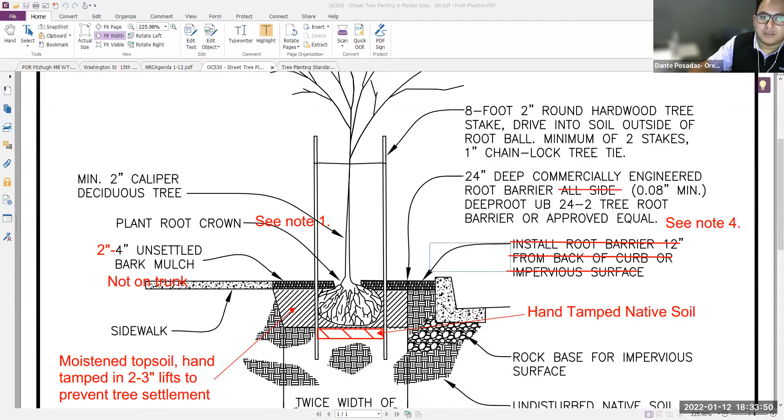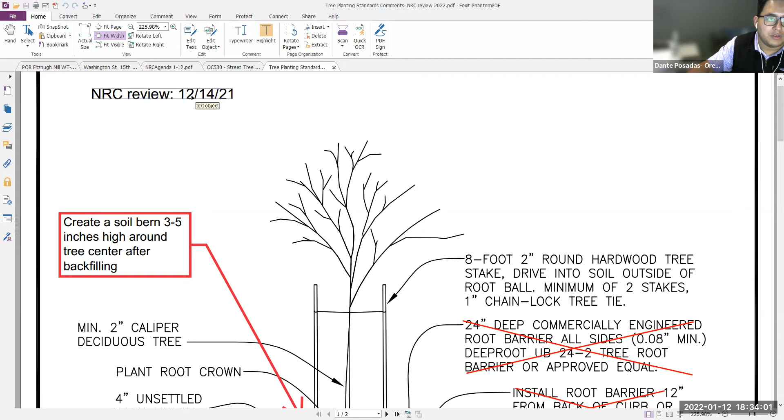Okay, so these are the comments we got from you guys in an email on December 14th. I don't know exactly when the review happened at the NRC meeting, but I got an email forwarded with these comments. You guys would like to see the 24-inch root barrier on all sides removed, and you wanted to see a root barrier flush with the sidewalk at 18 inches, minimum 10-foot length centered on the tree trunk. So I think that's what you guys are showing here.

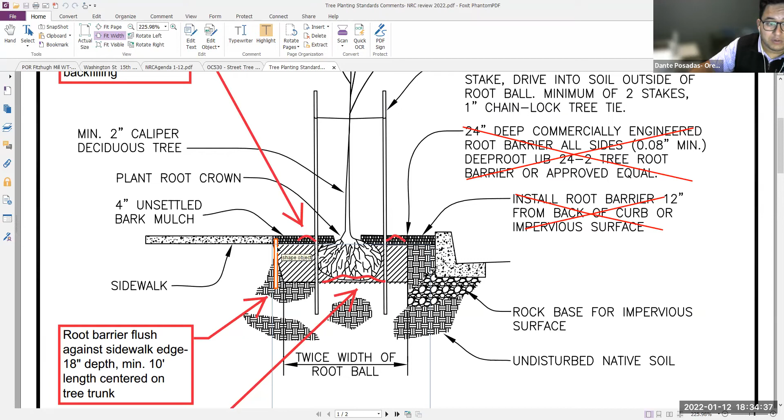You would like an 18-inch that spans 10 feet, which would be more or less 2 sidewalk panels. Here you also wanted to create a soil berm that was 3 to 5 inches higher than the top of the root ball or the tree center at the backfill.

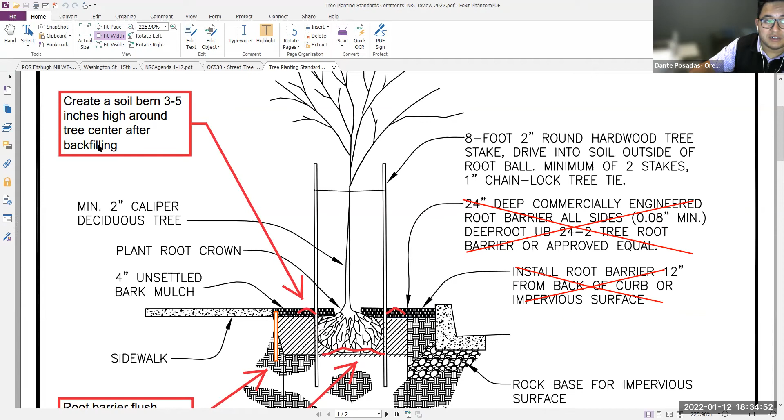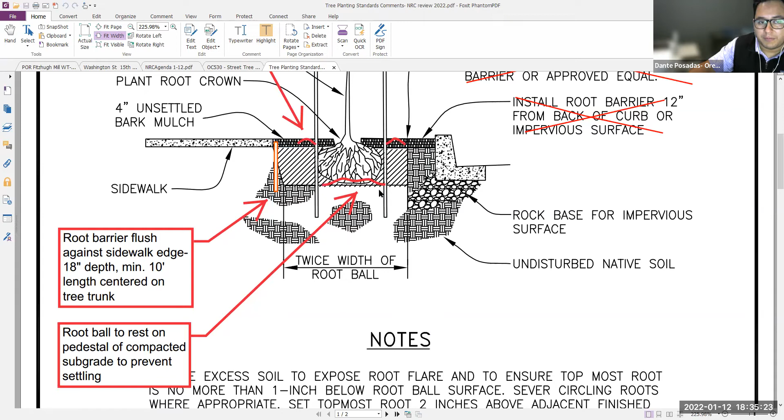And then this placement of the root barrier from the back of the curb or impervious surface, you guys cut that out at 12 inches. And then there was a note here that says the root ball should rest on a pedestal of compacted subgrade to prevent settling. So that's just ensuring that the root ball gets planted on some type of compacted subgrade so that it's not going to settle and cause any issues.

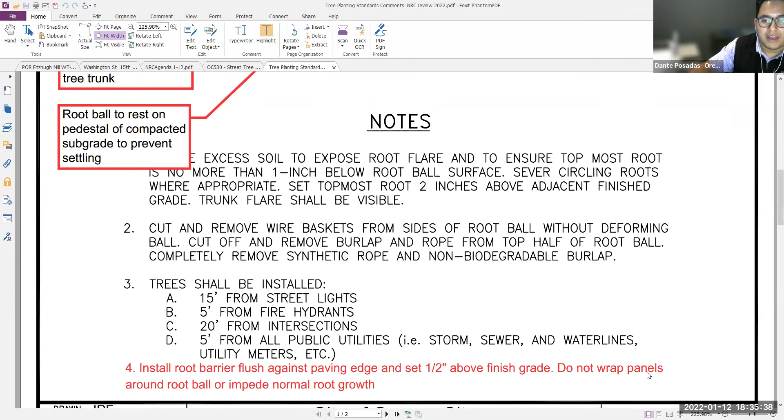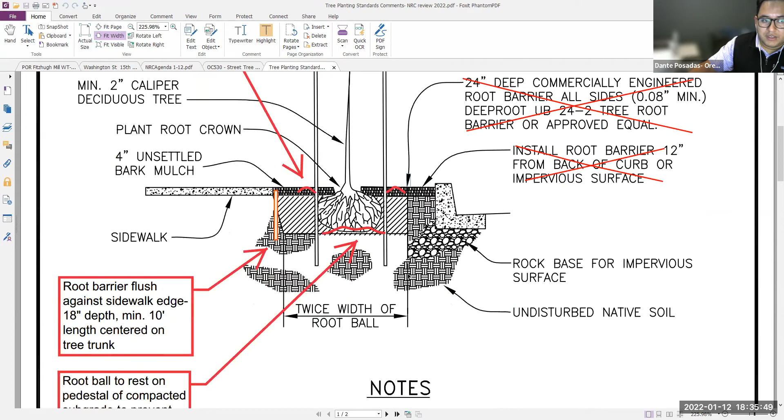And then install root barrier flush against paving edge, set 0.5 inches above finished grade. Do not wrap panels around root ball or impede normal root growth. So these are all the questions and notes that you guys had for us.

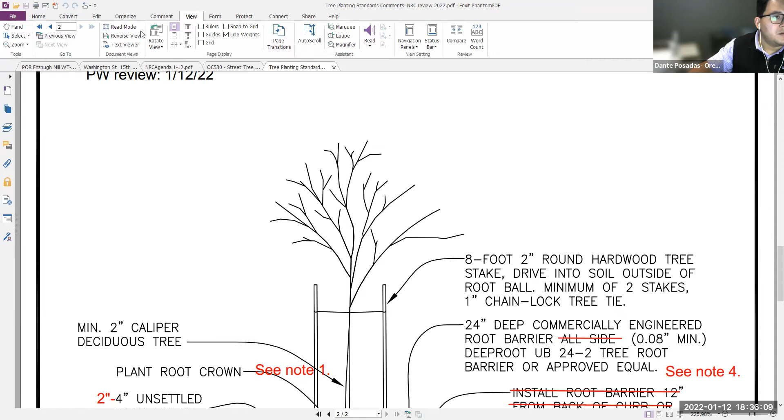We had an internal meeting with our street department and our development department, and we did a review of the standards. I'm sorry, let me make this smaller. Okay, so we did our own internal review. This is just dated for today, but we had one about a week ago.

We are still looking for the 24-inch commercially engineered root barrier. We will not—this is kind of trying to incorporate your notes with what we've seen in the field in construction and some of the issues that we feel we need to protect against.

So we want a 24-inch root barrier for protection, because generally our street sections are 18 inches in depth, and we want to make sure that we're protecting the compacted dirt, the curb, and the asphalt well. So that's why we are doing a 24-inch root barrier there.

The other reason why we have it at 12 inches from the back of curb is because generally when we're building roads, the compacted subgrade extends about a foot behind that curb, so that the curb has structural stability on the backside and won't settle or anything like that. So that's why we're going 12 inches off of the back of curb, and that's why we would like the 24 inches.

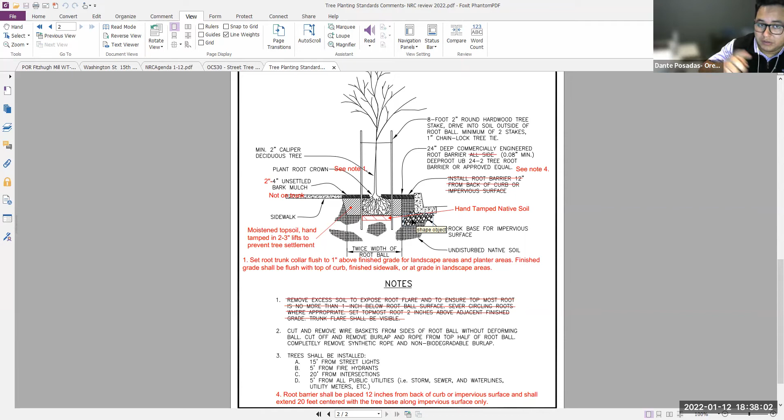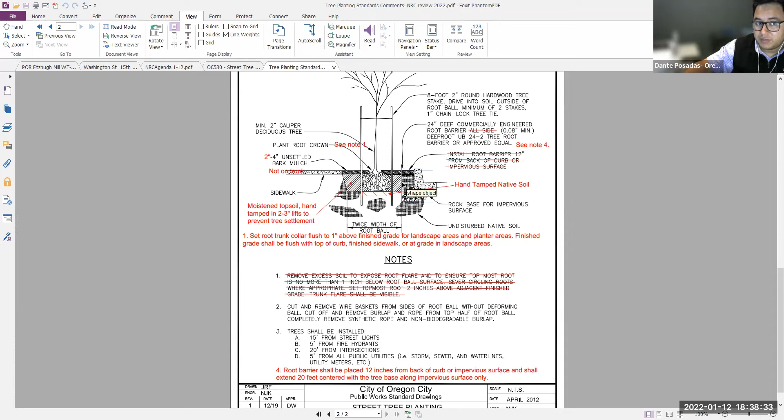Our old standard, as you see here, said all sides. In this new standard, we will be setting the root barrier 12 inches from the back of curb or impervious surface, and it shall extend 20 feet centered with the tree base along impervious surface only. So we will be extending 20 feet along the curb on each curb side, at 12 inches behind the curb.

And then on the sidewalk side, again, it will be 12 inches off of the sidewalk and extended for 20 feet. This is for the typical development tree landscape zone, which is 5.5 feet.

For the note that said a 3 to 5 inch berm, what we've accommodated is a note of placing the root crown. The root trunk collar should be flush to 1 inch above finished grade or landscape area planters. Finished grade shall be flush with top of curb, finished sidewalk, or at grade of landscape areas.

So the root barrier, or the root trunk, should be flush with the finished grade of the sidewalk or the top of curb. And then we will be placing 2 to 4 inches of unsettled bark mulch to accommodate that 3 to 5 inch berm that was being asked for. We're going to denote that a little bit better and show it more clearly on the drawing. This is just a first-time write-up that we had.

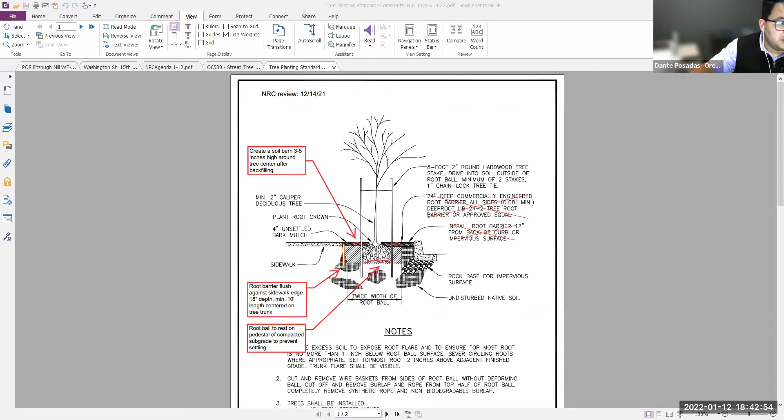So that's where this is at. And then I have an outline - sorry guys, let me stop sharing for a second. I have an outline of the comparison of how Oregon City aligns with other municipalities.

Can you guys see the planter strip detail? Sorry, hold on, let me just pull them in. Can you guys see this? Yeah, okay.

So as on the top here, this is Oregon City. This is the details that we looked at for each municipality, and then we outlined who's got the largest requirement, what that requirement is, and how we go about requiring, or who requires what.

So our 2-inch caliper is one of the highest. I think Corvallis, and maybe Bend, may have had a 2-inch caliper too. And then our 24-inch root barrier depth is on the higher end. There is, Wilsonville also uses 24-inch. I don't think ODOT is a great comparison, but we use them to establish our standards, so that's why they're on here.

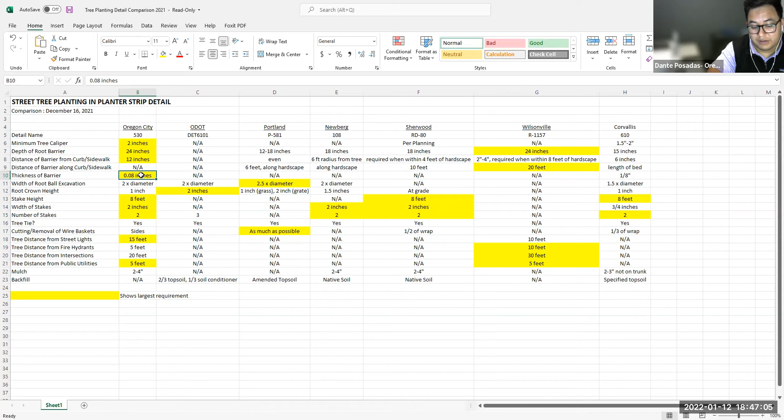But the issue here is that we have so much development and we don't want to plant a new street tree on top of a water line or on top of a sewer line. So we have the 15 feet from street lights to ensure that the lights and streets are illuminated. The fire hydrants and any water lines are 5 feet. Intersections are 20 feet for sight distance issues. And then public utilities, all other public utilities like storm or sewer lines, are 5 feet.

And then we require 2 to 4 inches of mulch, which is typical. And the backfill we're silent on, but a lot of people use native soil, and that's why we put native soil on our compaction note for the pedestal to sit on, for the root ball to sit on the pedestal.

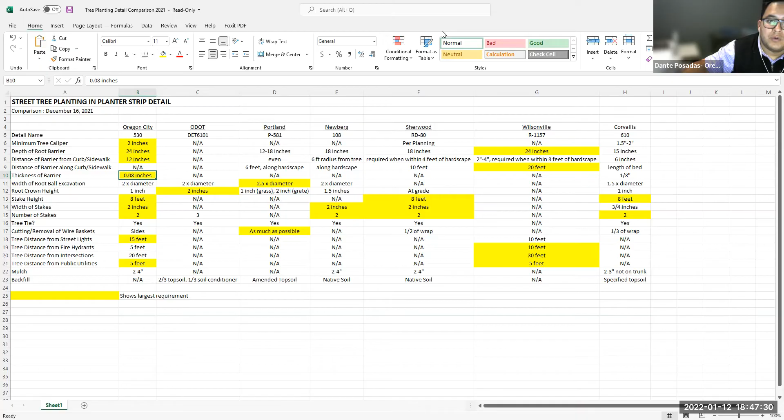So that gives you guys a little bit of an outline of the review of the notes that we're giving to planning at that last NRC meeting, and how Public Works, as the entity that houses these standards, is incorporating your comments while also understanding the challenges that the development community has, but also the challenges that our operations crews have with maintaining those curbs, sidewalks, and streets. So that's where that's at. Does anybody have any questions on that?

So I don't have a question, just a recommendation about the compaction. Based on the description, it sounds like they would just compact the center of the dig site, which would create kind of a bowl, potentially, just based on the wording of the instruction.

So I don't know if you could put another word or two that indicates a pedestal that lifts the ball a little bit up from the bottom of the hole. So that way you want aeration on the bottom of the root, so that it allows water to drain. Because if you create a bowl where you sit the ball, all the water is just going to sit at the very bottom and it could drown the roots, so then you're going to have a higher incidence of tree failure. So that's why we have that pedestal, to kind of lift it up out of the dig hole itself, so that it's a little bit raised up and allows a space for the water to drain and percolate into the soil below it and help the tree not drown.

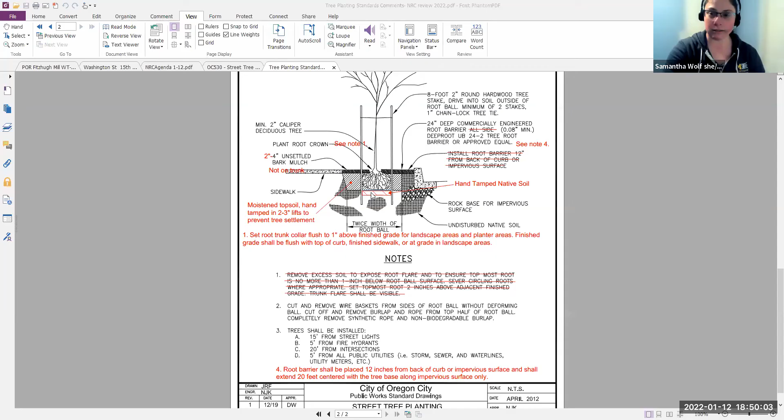Okay, I see the drawing now, kind of showing like a little hump on there. We weren't extremely clear on what you guys meant by 'pedestal of compacted subgrade,' so what we did was just put a compacted subgrade there with like a little box. Right, but it can be compacted, it just has to be like this little lift — he was trying to draw like a little hill. Yeah, a little lift, I see that now. So I think pedestal is a good example, but I don't know if it's quite simple to describe. It's kind of like describing how to tie your shoes — easier to see than to write.

So if there's a way to describe the compaction of a pedestal, a raised level of soil for the ball to sit on, but yet create a trough, if you will, around the pedestal that allows water to drain away from the root ball so it's not sitting in a basin. Because you can have compaction, but it could still be like a bowl. How deep, what type of lift is there? Like is it 2 inches, is it 8 inches? So 8 inches is too much — I would say 2 to 3 is good, just enough to provide a trough for the water to drain into away from the root ball, so that the roots can unfurl and grow into the soil without being drowned by water.

Because a ball is a really good description of what it is — it's all tangled up and has yet to expand and grow into the medium. But if you build a bowl, it'll drown. Okay, and is there a certain size that this pedestal should be? Does it have to be 2 times the size of the root ball, or just the size of the root ball? The size of the root ball. So pretty much you're asking for a 2-inch circular hill the size of the root ball with a trough around it, so that water can infiltrate into the trough and roots grow toward it downward.

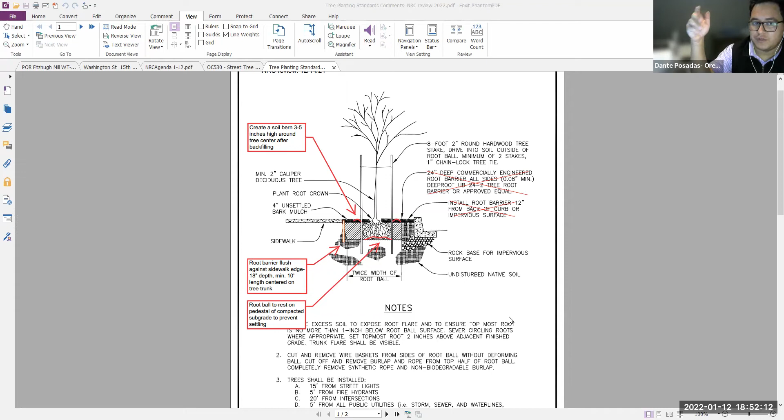And I don't know if it's in there already, but the hole itself should be at least 2 times the size of the root ball, right? I'm just not seeing it, but it's probably there. That way it will have that extra space, that trough to grow into — basically another root ball volume of space for it to grow into, and then not drown. Because these are going to be watered fairly regularly until they get a decent establishment going. So they're still pretty ball shaped after planting, but if they're in a bowl, they're going to drown.

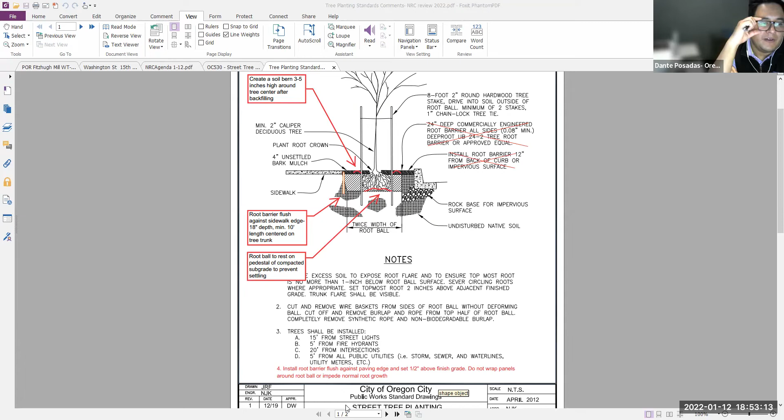So that's what Chris meant by pedestal. I think I can probably figure out how to describe that, and we'll go from there.

So, 1 time the width of the root ball, the pedestal shall be constructed for the tree to be planted on, and it shall have a 2-inch trough around the outside to enable watering and root growth.

So we'll figure that out, yeah. Not a big deal. If you want to talk about the trough too much, it could make more work than necessary.

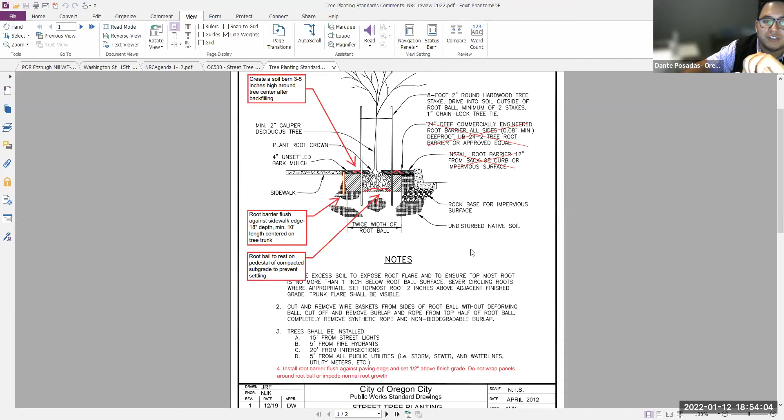Basically, our main objective is to get as much tree canopy as possible without damaging city infrastructure or causing damage to the community or the owner of the house. But you also want the tree to live, otherwise you're just throwing tree canopy money away, and people are upset, asking why isn't my tree living?

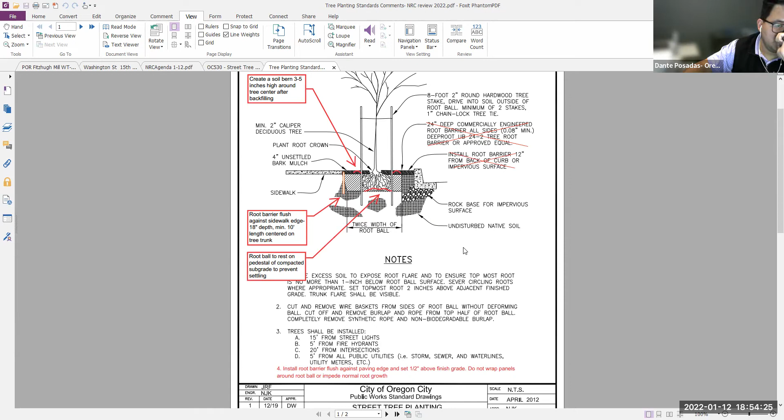It could be many reasons, but one reason could be it's drowning in the hole. So for the pedestal, you could just say it's so high and so big, and I don't know if it's necessary to talk about how wide the trough is.

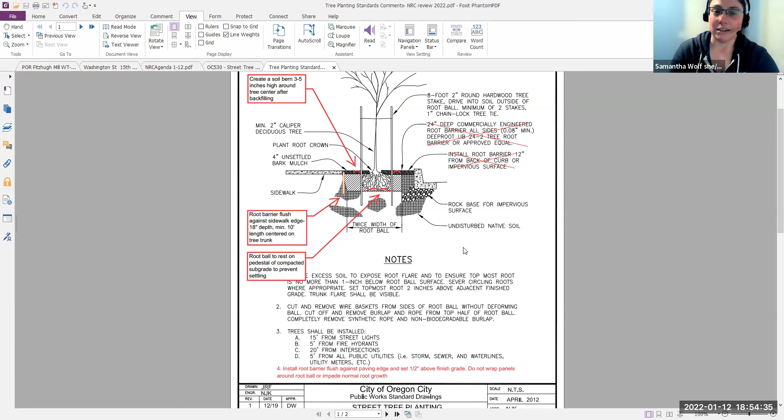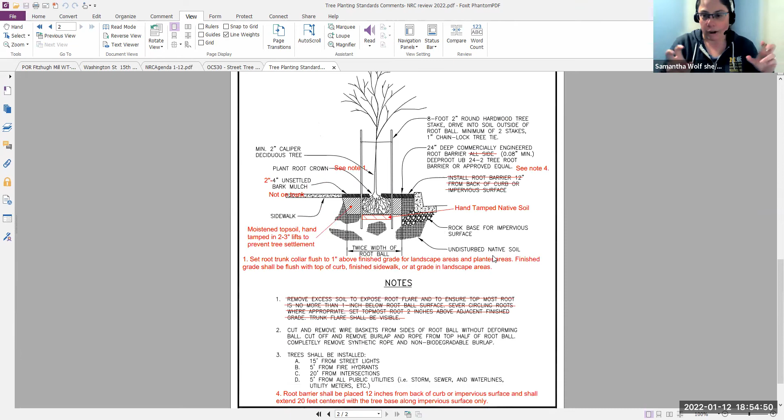That depends on the size of the tree, right? So you can let the tree size kind of determine how big that pedestal is going to be and how much trough space is left over. So the trough is really just the leftover hole that is absent the pedestal.

Yeah, you're right. We could probably just describe the pedestal, and the trough will handle itself pretty much.

The other question I had for the standard was, we used to do root barrier on all sides, and that was in an effort to minimize any type of damage, because like it or not, on new development, trees are hard to fit in the planter space when there's driveways, sewer laterals, water laterals, hydrants, and streetlights. On each new development, there's all of those things.

In the past, we have placed root barrier. In the recent past, since 2019, when we updated this detail, we had placed root barrier on all sides of the trees. I haven't seen much damage occur because of that, but that is relatively new.

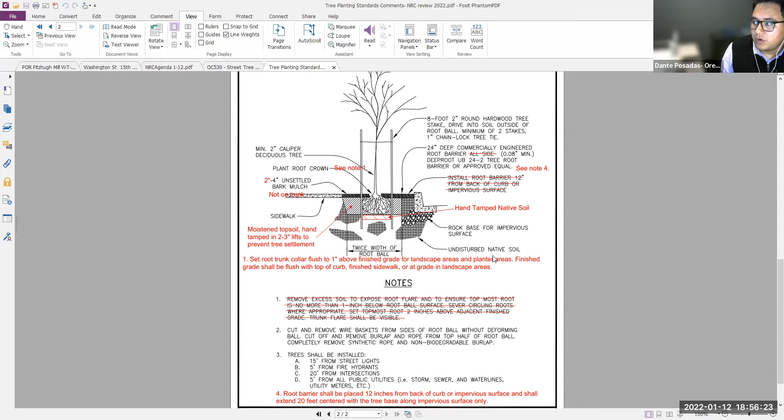So does the NRC have a staunch stance on why it shouldn't be placed on all sides?

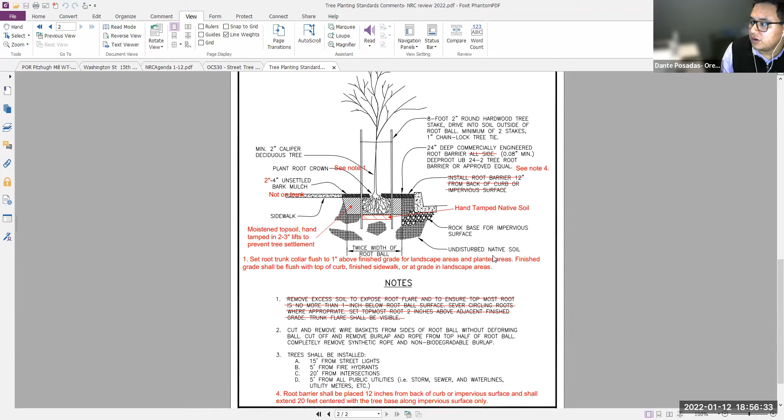Well, maybe we could put a rationale to it, because you're effectively shrinking the plant site by the root barriers, even though we've described it as 5 feet, right? That's what our list looks like, and that's what I inherited anyway. So the expectation is that you got 5 feet to work in, but in reality you got 3 with the root barriers, right?

So it's inaccurate to say you got 5 feet for a tree when actually you only got 3 for the root barriers. It would be great to improve canopy, to get big trees in, to have bigger planting sites in general, and then have the root barriers within that, so you have a wider space for the tree, instead of a real 5 feet meaning you've got a 7-foot strip, or something like that.

So maybe we should talk later about the minimum sidewalk strips, because they're actually not 5 foot if you got root barriers a foot in from both the sidewalk and the curb. So those 2.5 footers are really just 1 footers, or half footers, in perspective of the tree.

So I guess I would say, if I had any voice, it would be great if our minimum strips were 7 feet, and that would mean we would actually have a real 5-foot planting space. And that would give more room for the infrastructure, and more space for all the other competing needs for the strips.

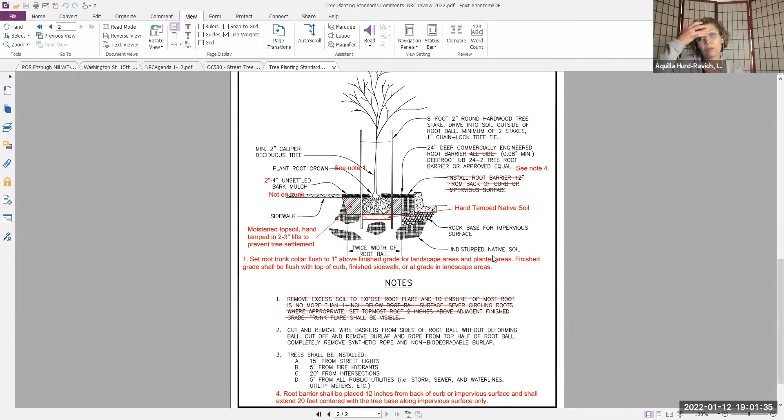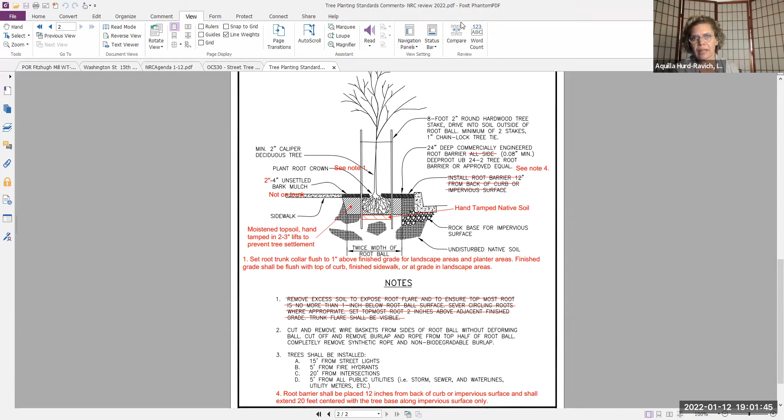Can I ask a question? Yes. So is the canopy size affected then by the tree's ability to, by the root ball, I guess is what I'm getting at. Like if it goes from the 5 feet to the 3 feet, does that mean that tree is never really going to get to maturity? And so we end up with the smaller canopy.

Well, plus, if you've got a small planting site, you might want to plant a different, smaller tree there. We were looking at what trees went where as a 5-foot strip. And now if that's a 3-foot strip, then maybe we need to totally redo the tree strategy, because...

A tree that has a 5-foot root area is going to be very different, can be much larger than a tree that only has a 3-foot root area, because you've got to have a decent root system to support a big tree. So if we want a decent sized canopy in Oregon City, we have to have some areas where we can plant bigger sized trees and know that the root systems are going to be enough to not only support the tree as it grows, but also to make sure it doesn't fall over in a windstorm because it's too small and it's too cramped in a little area.

And I guess that is part of what I would wonder from the engineering side, if they would be okay with that, moving the root barrier to the sidewalk and giving it a little bit more room.